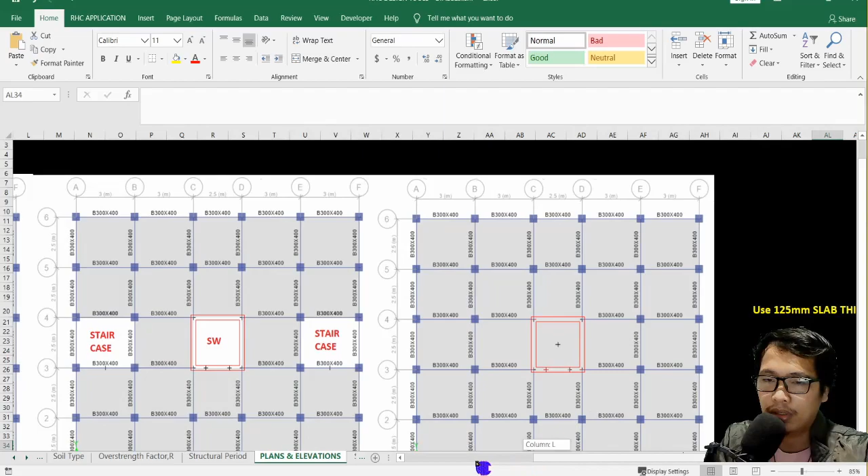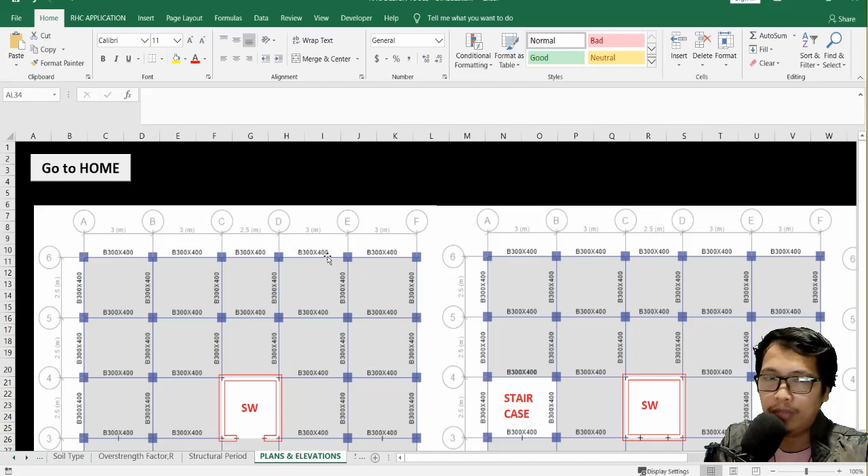As you can see in the NGL plan or the ground floor—by the way, the level of the NGL and ground floor is the same as per my design. So if you can see, this is 12 plus 2.5, that is 14.5 meters by 12.5, by 14.5, a 7-story residential apartment building.

Okay, then we have a shear wall in the middle. Then let's come now to the second floor up to the 7th floor, which is our typical floor.

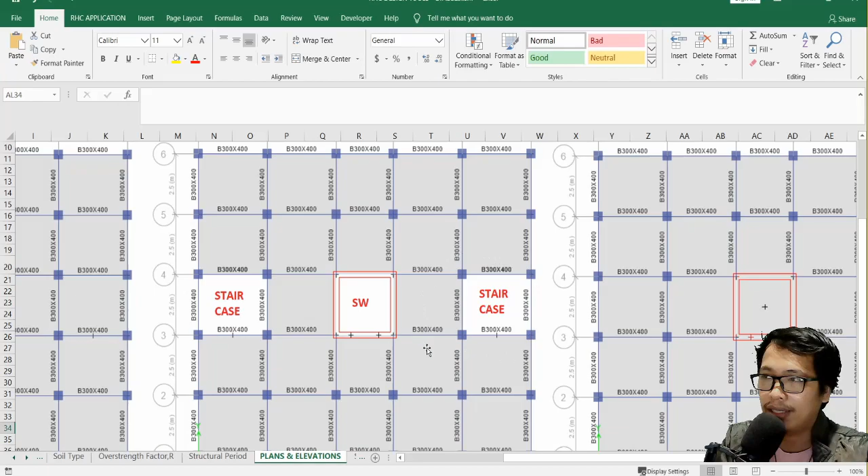So as you can see, we have two staircases, the left and right, which is along the grid line 3 to 4.

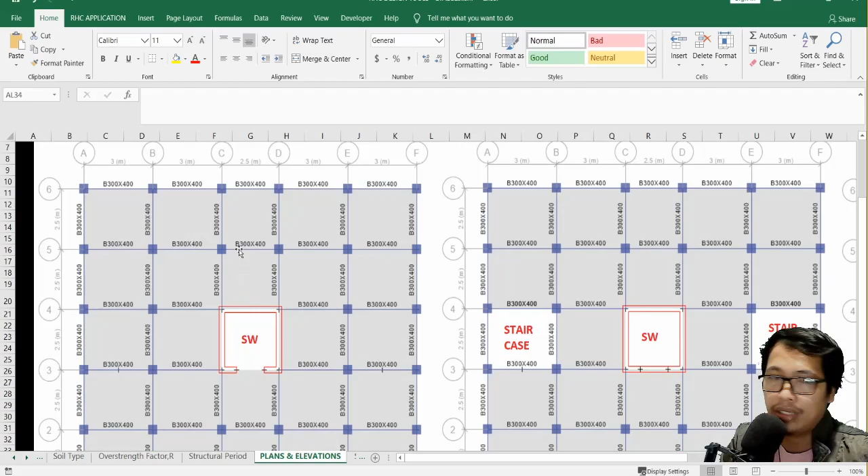...the elevations. Let's go back first to the dimensions. As you can see, the initial condition, the initial dimension of the beams, is 300 by 400, same with the upper floors, upper beams.

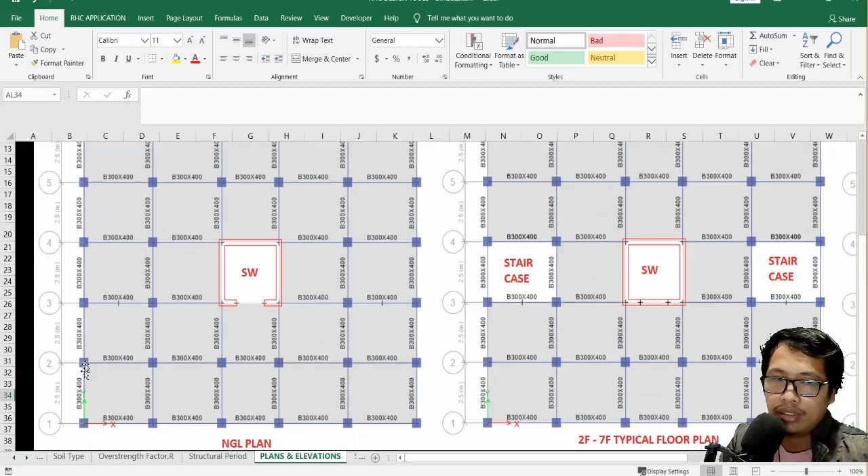Then in the elevations at grid line A, as you can see in the plan, this is grid line A. So if we look at it, these are the elevations. Then the initial assumption of the size of the column is equal to 400 by 400.

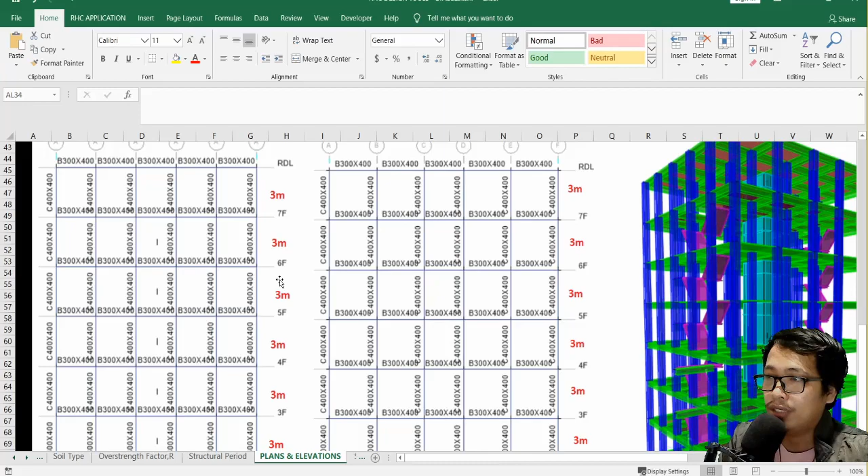Then our assumption from the foundation to the natural grade line is 2 meters. Then from the natural grade line up to roof deck level, the elevation is the same per story, which is equal to 3 meters. Okay, this is for grid line 1.

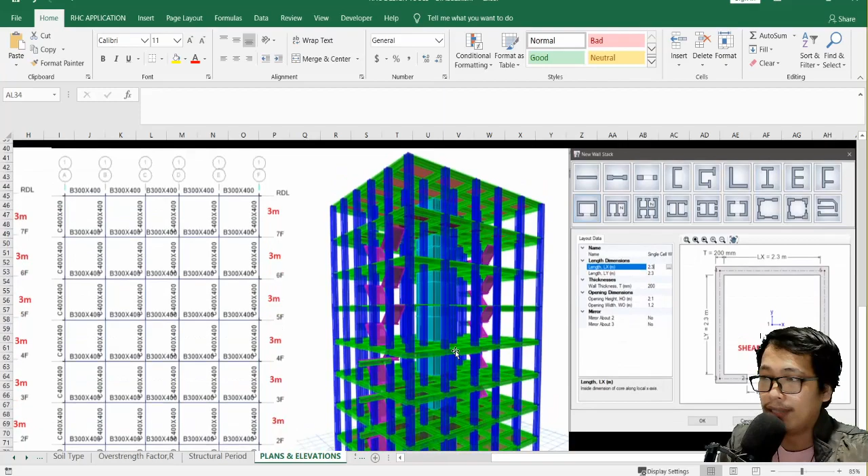As you can see in the 3D model, this is our structural 3D model, the perspective. Then we also have the detail of the shear wall, which is this.

From the face of this wall to the other end, it has 2.3 meters, same with the other axis. Then we have an assumption of 200 mm thickness for the shear wall. Then the opening for the elevator is 1.2 meters, with a height of 2.1.

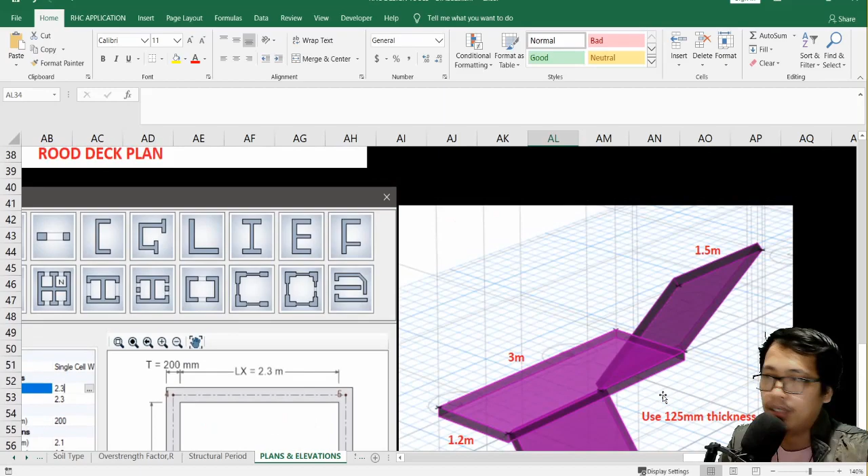Okay, then for the stair detail, I modeled it directly into the structure. So we have 1.5 meters as the width of the stair, same for the first and second flight. Then for the landing, we have 1.2 meters width, and a length of 3 meters, then 1.5 meters height at every flight.

So that's what I meant: the elevation or height is 1.5, then another 1.5 on top, so you'll notice that totals 3 meters. Then of course the assumption is to use 125 mm thickness for the stair slab.

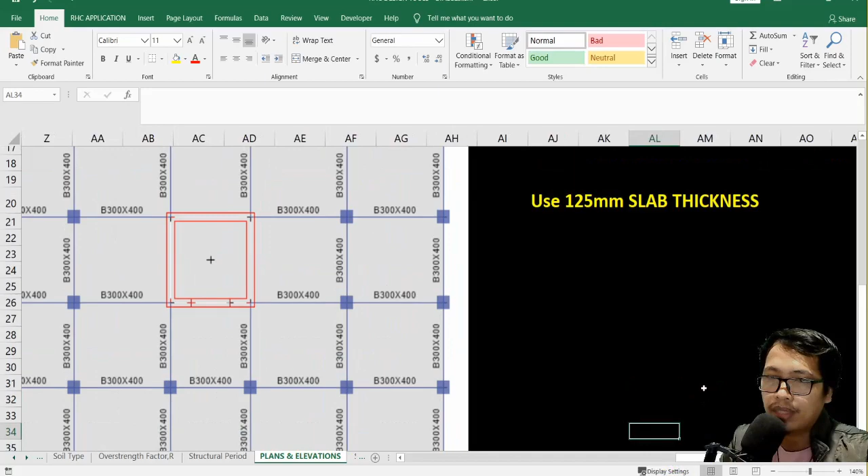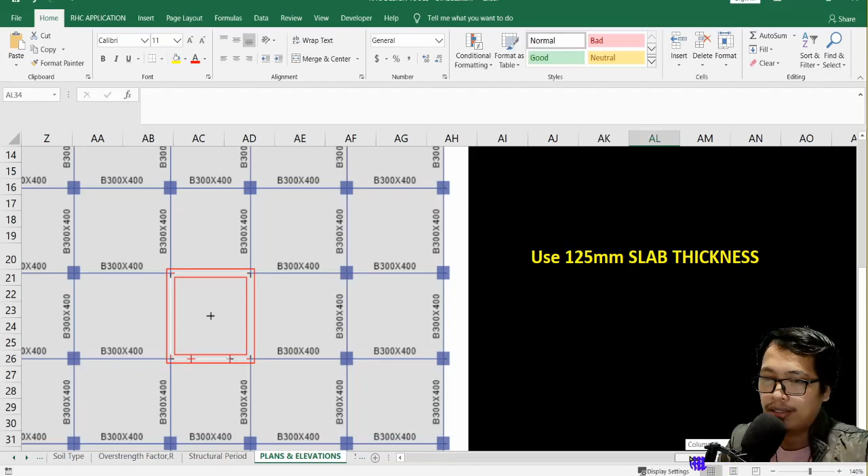Okay, so going back, for the assumption of the slabs, the floor thickness, we use a 125 mm slab thickness. Then let's go to home.

So the design specifications or references for this are the NSCP 2015, the ACI 318-14 for concrete, the UBC 1997 for earthquake, and ASCE 7-10 for wind.

Okay, for the materials, we use concrete and rebars. For the concrete, we use f'c or compressive strength of 20.7 megapascals or 3000 psi. While for the rebars, we have two classes: the main bars with fy equal to 415 megapascals or 60 ksi, then fyt for the stirrups and ties, which we can use at 275 megapascals or 40 ksi.

So our main bars are grade 60, then grade 40 for the stirrups and ties, as per ASTM 615. Okay.

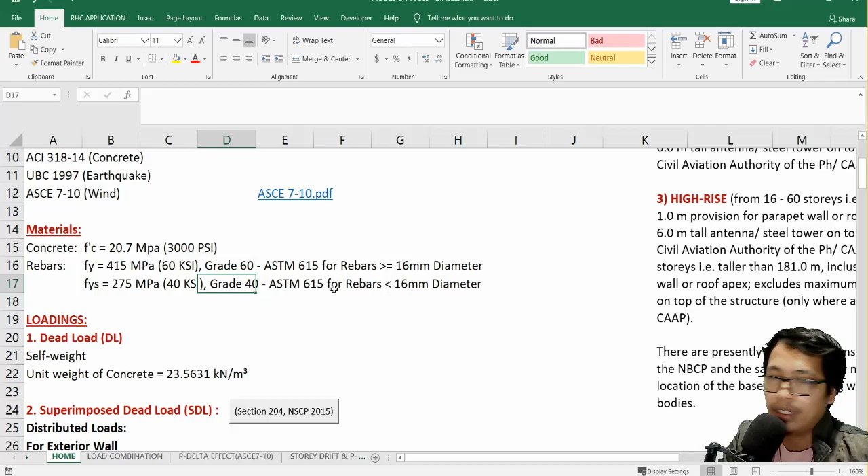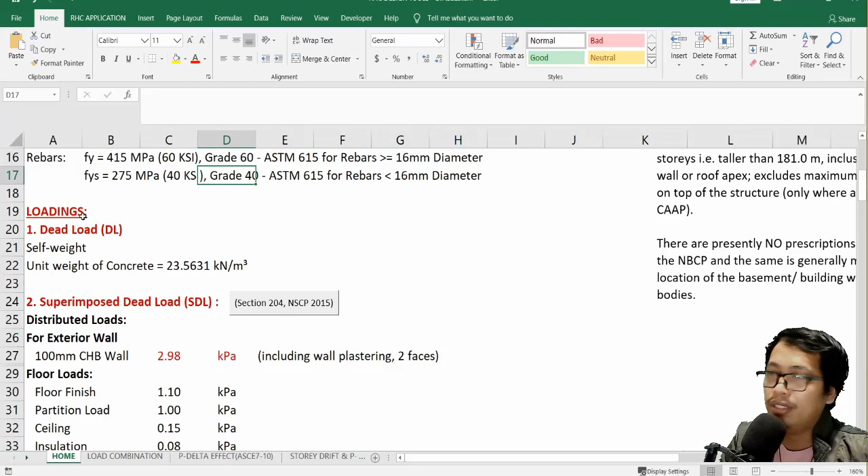Sige, discuss muna natin yung loadings. Okay, for the loadings, so may dead load tayo. Then under sa dead load, may self weight tayo, which is the weight of the structural members.

Then yung unit weight natin ng concrete na gagamitin natin is 23.5631 kilonewton per cubic meter.

Then may superimposed dead load tayo, or the SDL, as per section 204 NSCP 2015. Bali gagamitin nating exterior walls dito is the 100 mm CHB wall. So may 2.98 kPa tayo, which is including yung dalawang face ng plastering, as you can see in section 204 para sa 100 mm.

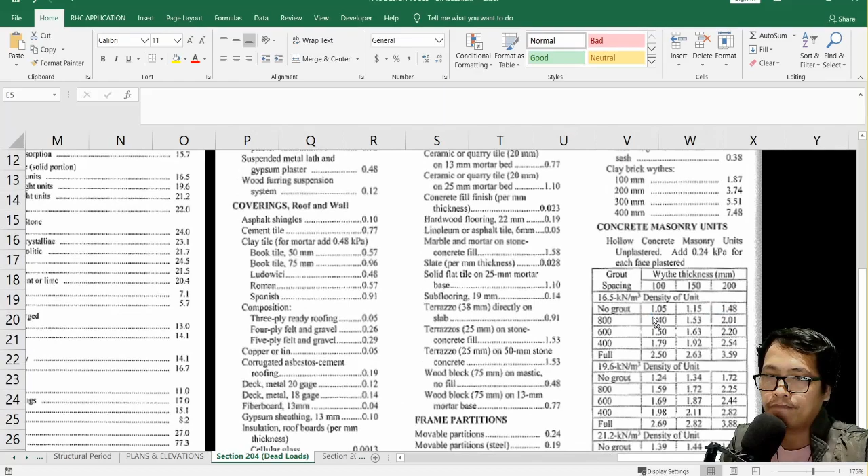Yung assumption natin rito is the full grout na wall para sa weight natin. Yung para sa 100 mm, bali yung weight natin or the load is 2.5 kPa.

So mayroong dalawa pa tayong 0.24 kPa para sa dalawang faces, kaya aabot yan sa 2.98 kPa. Balik tayo, check natin nun. Ito, as you can see in the formula, that is 2.5 plus 0.24 times 2, so 2.98 kPa.

Yung exterior walls natin, i-apply natin yan mamaya.

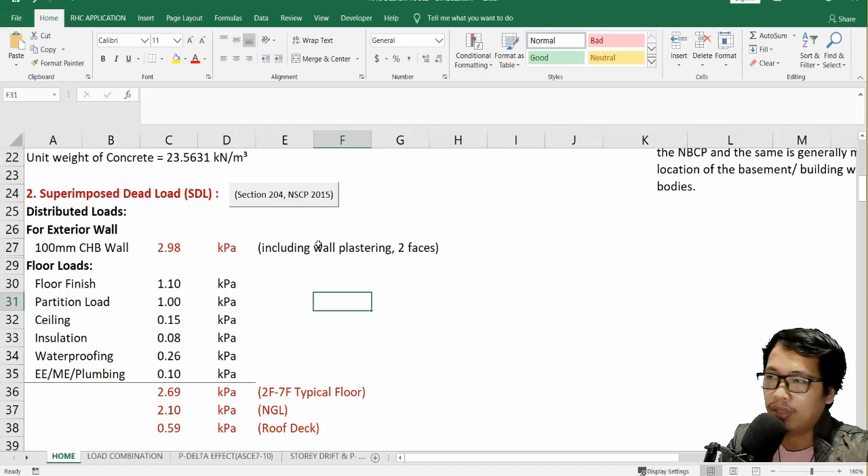Okay, for the floor loads naman, for the upper floor natin, may floor finish tayo, partition load, ceiling, insulations, which include yung mga sa mechanical natin insulation, waterproofing, then EE/ME plumbing. As you can see in the NSCP, o kapag wala sa NSCP, you can use the internet or the search bar sa Google para makuha ninyo yung specific na materials.

Ang kailangan natin yung unit weight ng per materials. Bali yung sinearch ko dun sa Google, ito yung waterproofing kasi wala dun yung waterproofing. Pag i-plus natin yan, naabot yan ng 2.69 kPa for the typical floors.

So second floor up to the 7th floors, okay na yan, 7 floors wala kay. Then while in the NGL is 2.1. Bakit 2.1 kPa lang? As you can see in the formula, ito lang yung floor finish plus the partition load. Kasi wala nang ceiling, walang insulation, walang waterproofing, then walang plumbing, yun yung assumption ko rito.

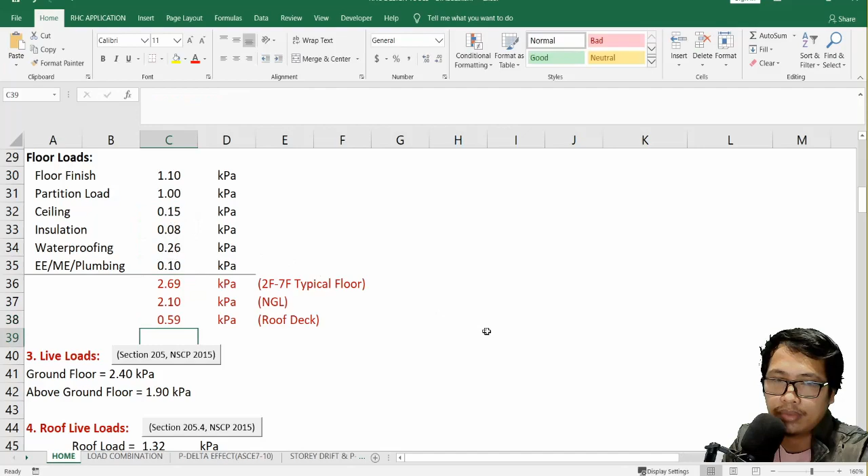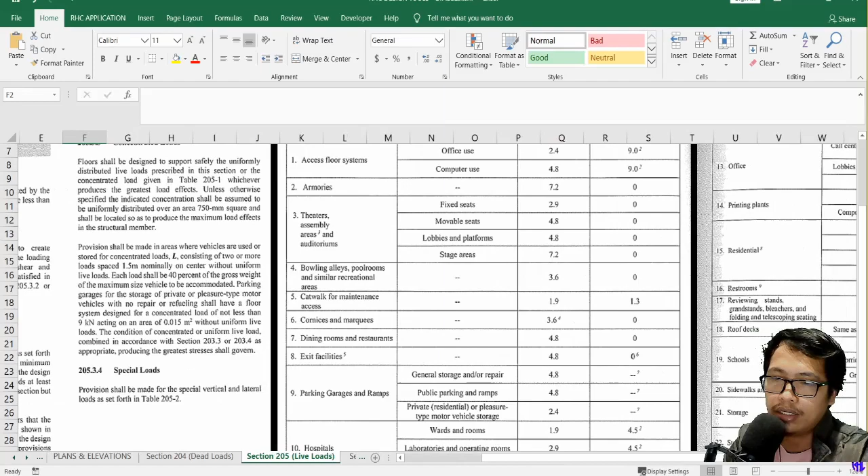Let's continue. Let's come now sa live loads. For the ground floor, assume ko is 2.4 kPa as per section 205 NSCP 2015. Then the above ground floor is 1.9 kPa. Kapag residential, as per the NSCP, kasi residential naman yung i-design natin, so yung basic floor load is 1.9 kPa.

Let's continue. Para sa roof live loads naman, pupunta tayo sa section 205.4 ng NSCP 2015. Yung roof load natin, yung assumption case, papasok tayo sa 1.32 kPa.

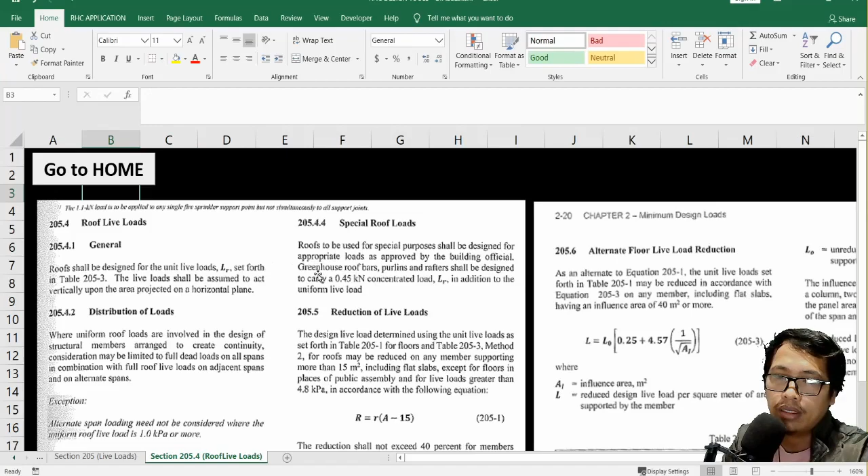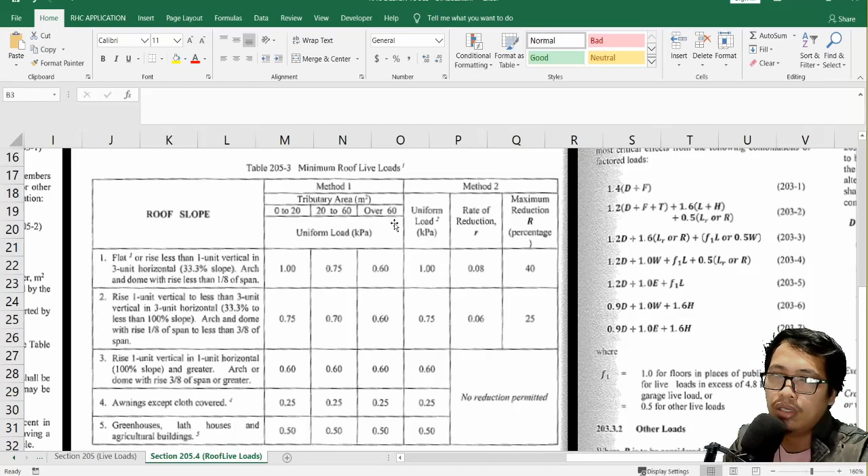Bakit again 1.32 kPa? That is 0.6 plus 1.2 times 0.6. Kasi yung 0.6 natin, as you can see, that is ang load ng flat roof. Ito yon, yung 0.6 natin. So over 60 yung tributary area kasi malaki yan, so 0.6.

Tapos kung mapapansin niyo, may 3 na designation yan, so babasahin natin yung 3. A flat roof is any roof with a slope less than 1 unit vertical in 48 unit horizontal, or 2% slope. The live load for flat roofs is in addition to the ponding load required by section 206.7.

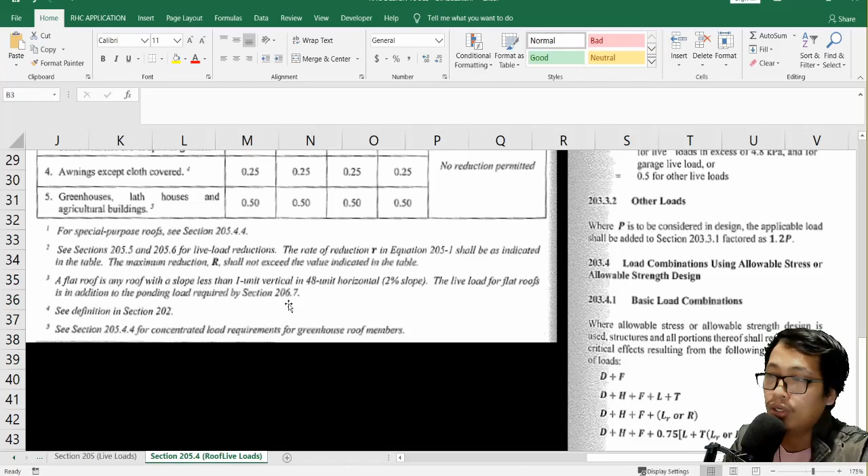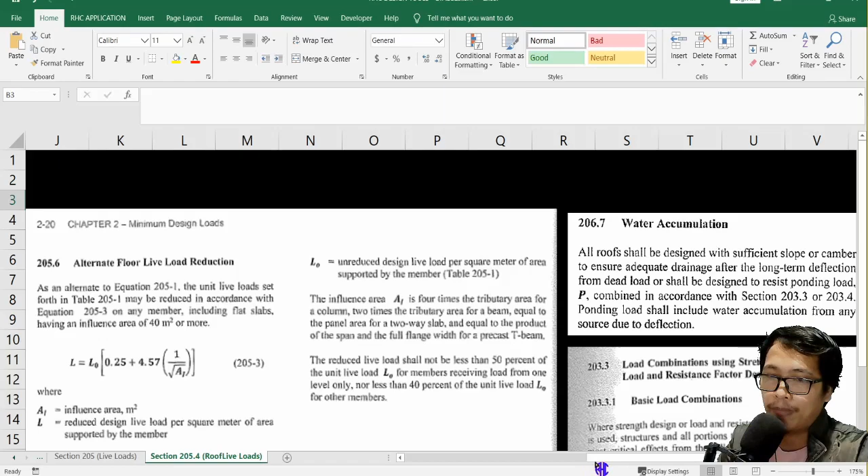Bali, additional ponding pa tayo doon. Section 206.7, kapag balikan natin, that is the water accumulation. Sabi naman doon, all roofs shall be designed with sufficient slope or camber to ensure adequate drainage after the long-term deflection from the dead load, or shall be designed to resist ponding load combined in accordance with section 203.3 or 203.4.

Ponding load shall include water accumulation from any source due to deflection. So, yung section na to, this is the load combination. Kapag i-check natin yung other loads rito, sabi rito, where P is to be considered in design, the applicable load shall be added to section 203.3.1, factored as 1.2P. Kaya, yung load ko para sa ponding o para sa roof live load is 1.2 times P.

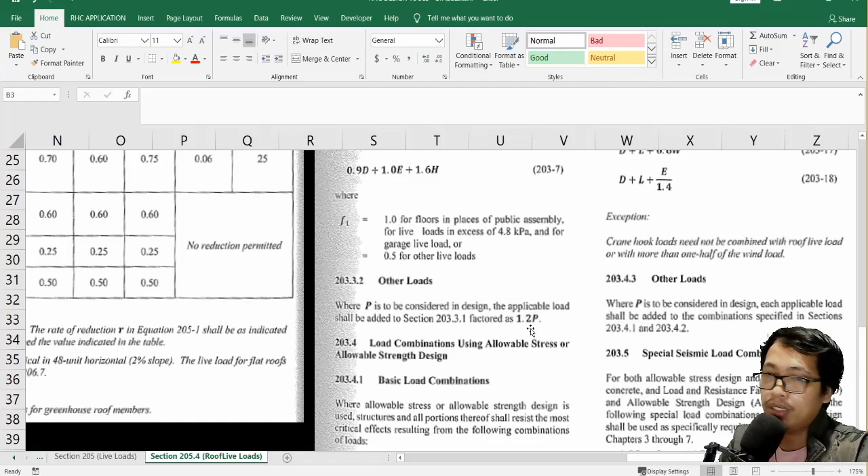May additional siya na 1.2 para sa ponding. Balik tayo. Kung mapapansin niyo, yung roof load natin na 0.6 plus the ponding, the 120% of the roof load. Okay, let's continue.

So for the seismic load naman, as per NSCP o by the UBC 1997, we can use the X and Y direction. Then we can consider this positive and negative eccentricity. Then we can use the eccentricity ratio of 5% or the 0.05 decimal.

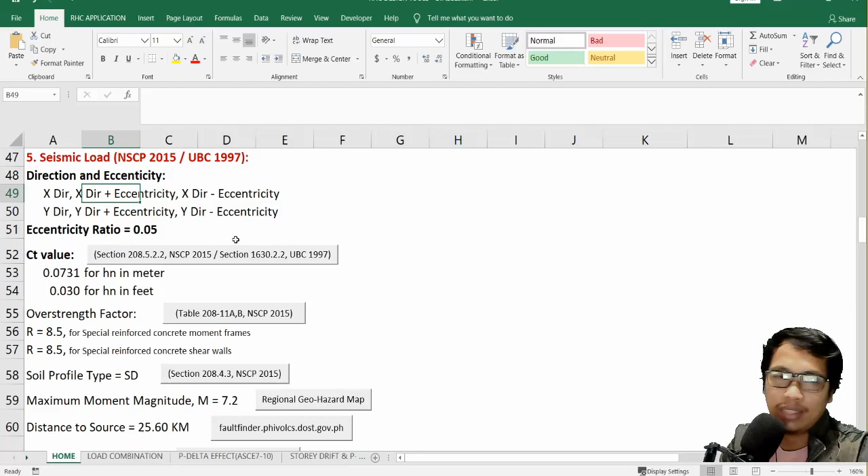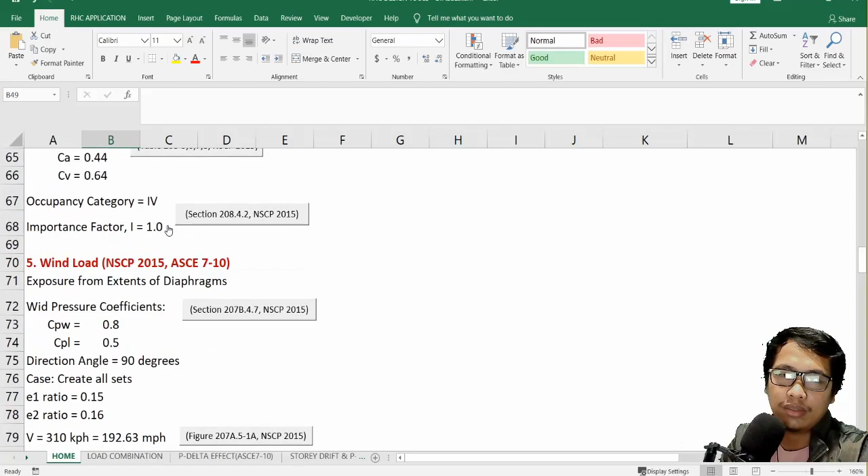Okay, so discuss muna natin to. Okay, so seismic, ito yun. Balikan natin mamaya after we model the structure. Then number 5, may wind load tayo as per NSCP 2015 o the ASCE 7-10. Then may mga coefficient tayo.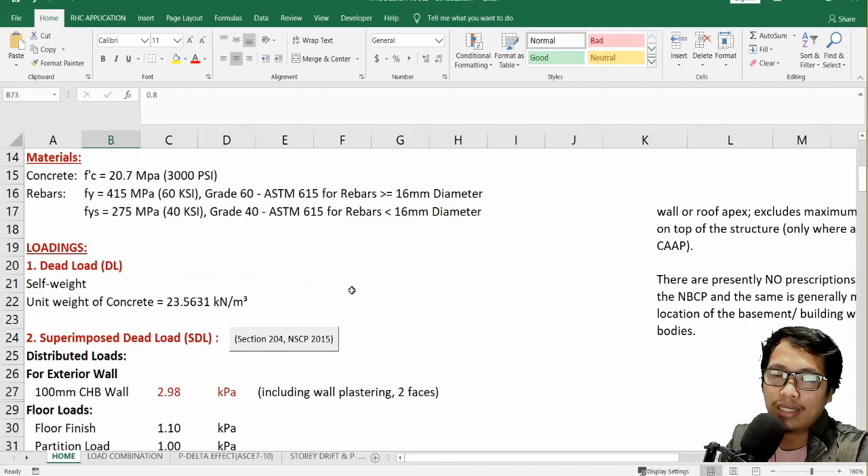Okay, balik muna tayo dun sa model. Balik na tayo dun, mag-model tayo na sa structure natin. Okay, so first mag-new model. Then use built-in settings, dapat naka-metric tayo. Okay na din.

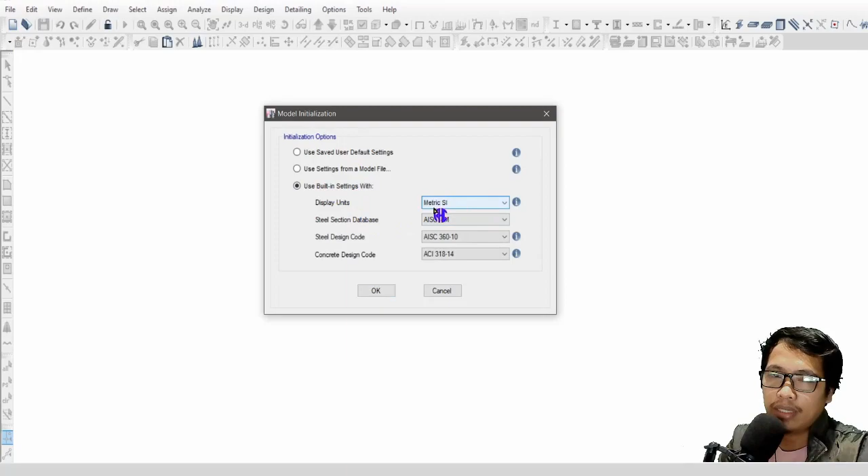Okay, gagawin ko muna to, mamaya ko na i-edit yung parameters natin. Hintayin natin yan. Close ko lang to, gusto ko yung isa lang interface. Dito ko na i-edit yung parameters natin.

Grid lines, modify, show grid lines. Then display grid data spacing. Yung bubbles natin i-reduce ko na lang ng mga 700. Okay, as spacing. Okay, so as per sa

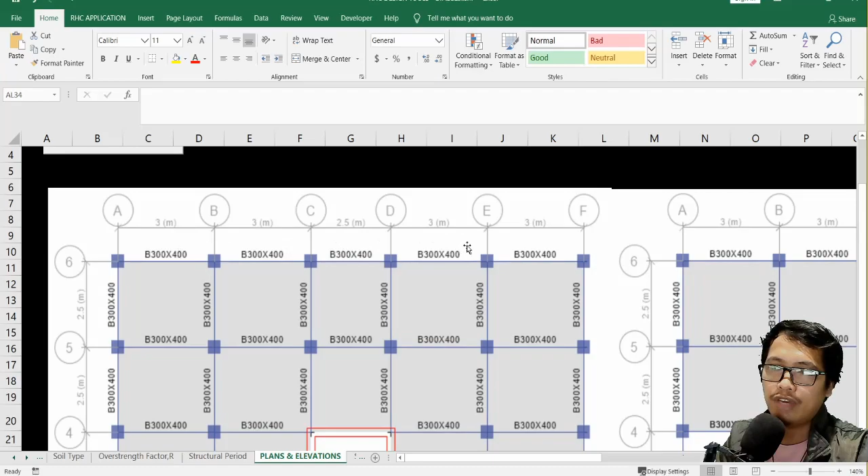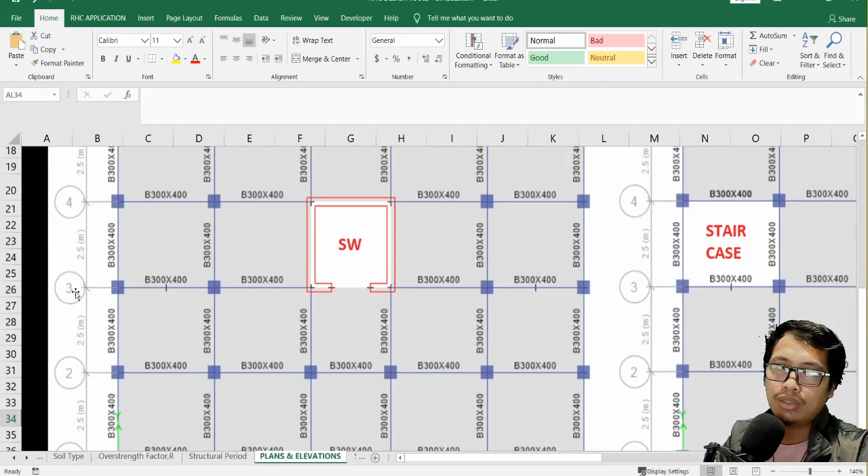parameters natin sa plans, yung along X direction natin, that's 3, 3, 2.5, 3, 3. Then A, B, C, D, E, F yung grid line natin. While in the Y direction, that is 1 to 6, tapos lahat siya 2.5 meters. Okay, so that is up to F, so mag-add ako dito ng up to F. Then change ko to ng 3 meters, 3 meters, then 2.5, 3 meters, and 3 meters.

So kapag spacing, yung gagamitin niyo dapat naka-0 yung huli palagi. Then para sa Y direction naman, okay, so that is up to 6 grid line. So kailangan ko magdagdag ng dalawa. Spacing natin is lahat 2.5.

Okay, then as you can see, nagano siya, makikita natin yung update ng grid lines. Then kung okay na yan, so just click OK.

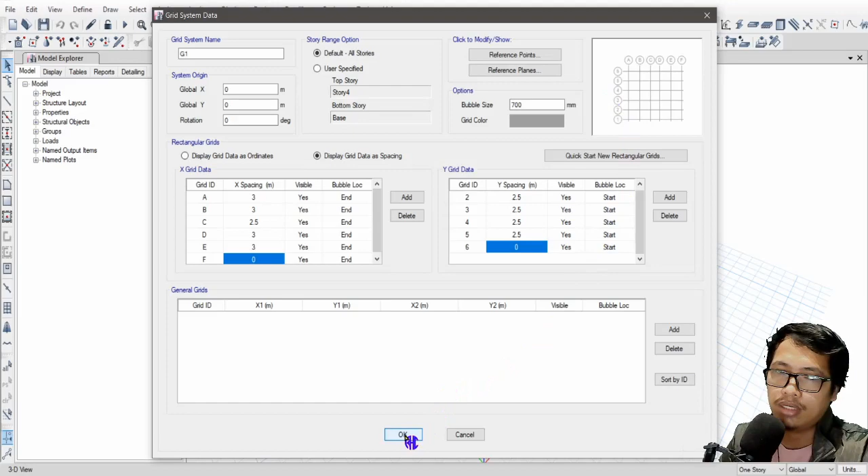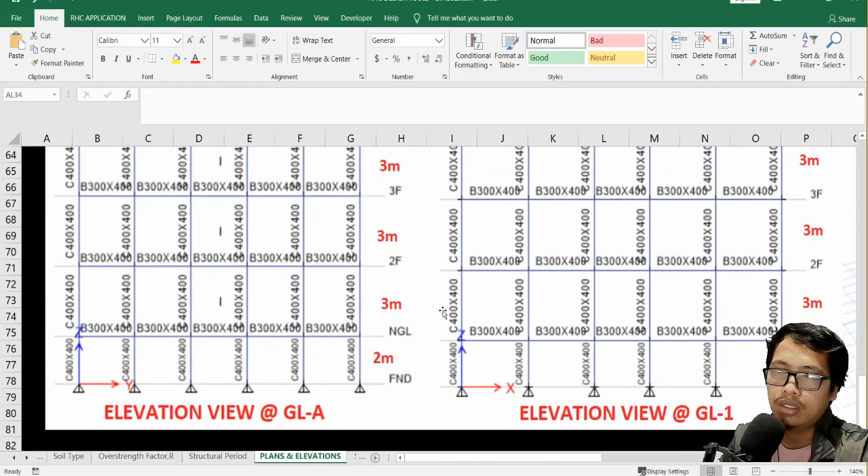Then punta na tayo doon sa elevation, the story data. So story data natin, as you can see in the elevation, okay, so bali may 2 meters tayo from foundation to NGL. Tapos NGL to second floor 3 meters. Tapos yung typical natin up to 7 floors or the roof deck, so 3 meters na yung height natin.

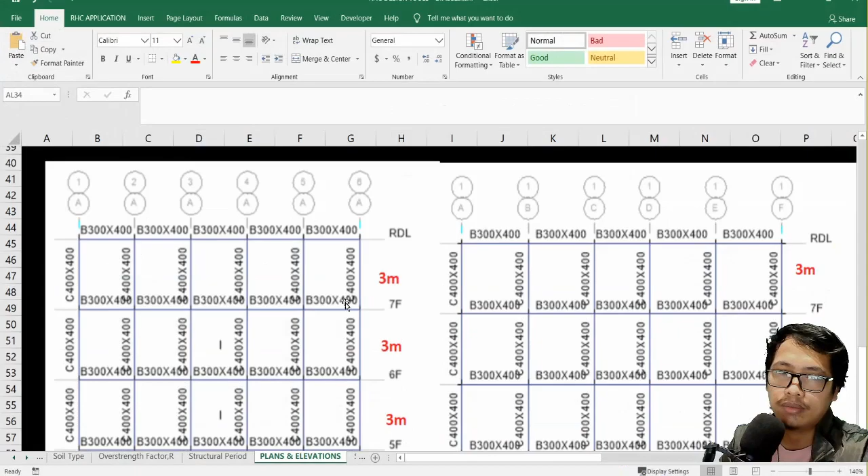Okay, so bali 1, 2, 3, 4. Ilan yung kulang natin doon? Okay, so bali balik tayo. So this is 1, 2, 3, 4, 5, 6, 7, 8, 9. 9 yung level na gagawin natin. This is 1, 2, 3, 4, 5. So kulang pa tayo ng 4.

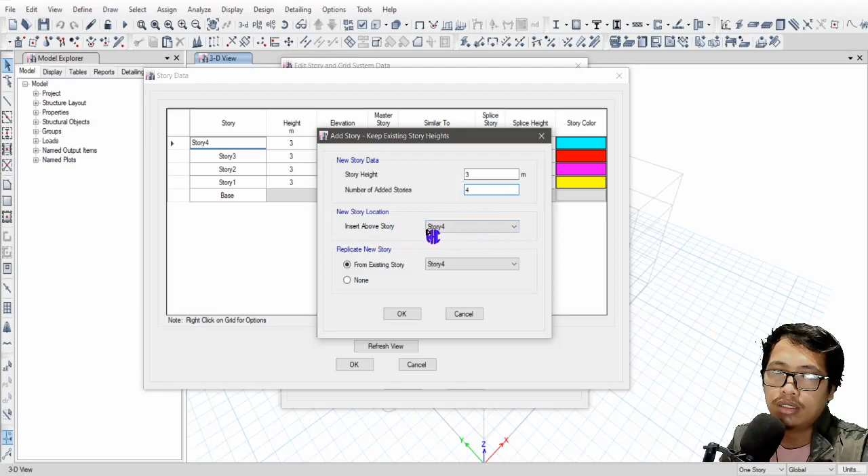So click lang dito, right click, add story, keep existing story height. Then 4 yung kulang natin, 3 meters. Then number of added stories 4. Insert above story 4. Okay, then i-on lang yung replicate new story.

Okay, so this is foundation. So yung designation natin, foundation. This is the NGL, 2F, 3F, 4F, 5F, 6F, 7F, and this is the RDL.

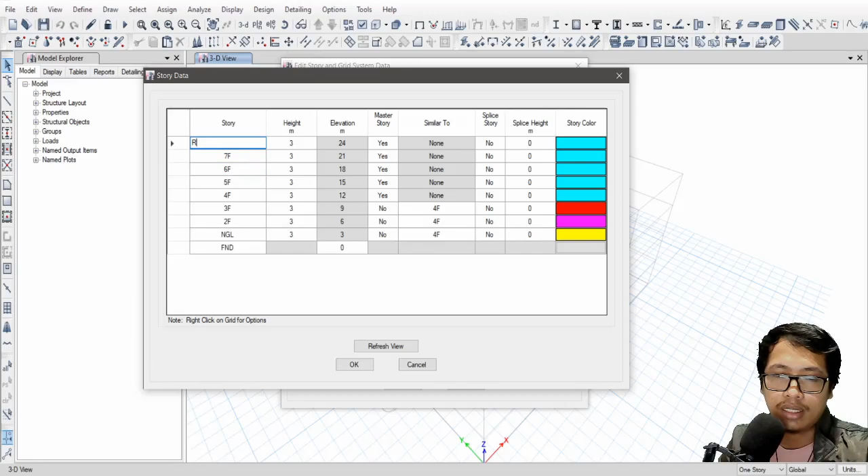Okay. Wait lang, hindi natin na-edit yung elevation, yung story height. So this is 2 meters, then the rest is 3 meters. Okay na yan, so as you can see, yung elevation total distance natin, total elevation, that is 23 meters.

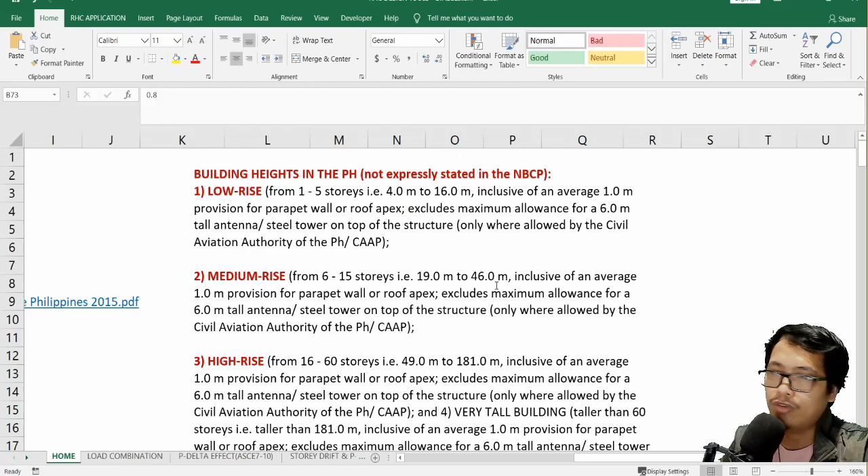Yung kapag i-compare natin dun sa qualification ng medium rise building as per National Building Code, so papasok tayo, kasi that is between 19 meters to 46 meters. Okay.

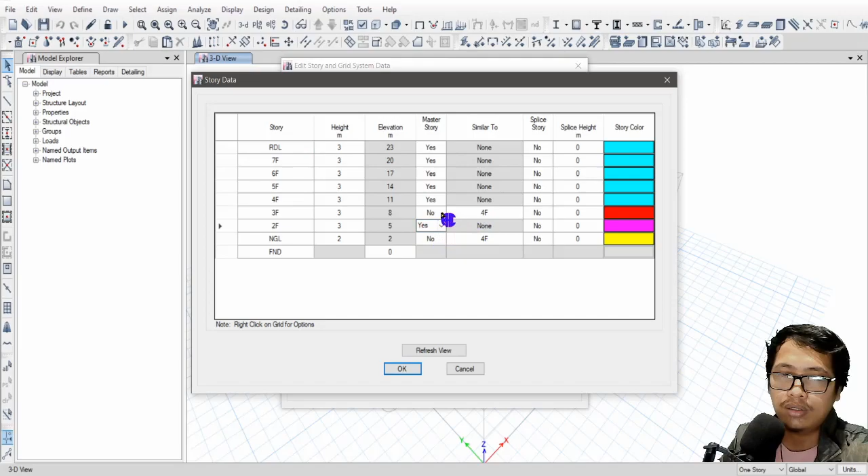Then mag-set tayo ng master story. Yung master story, para once na every time mag-change tayo doon, yung kaparehas na story is automatically mag-change yung mga changes. Then yes natin to, then the rest no. Bali yung master story natin is yung second floor.

Tapos yung typical floor natin ito, copy paste na lang natin to up to the 7th floor. Yan, then okay. So ito na yung structure natin.

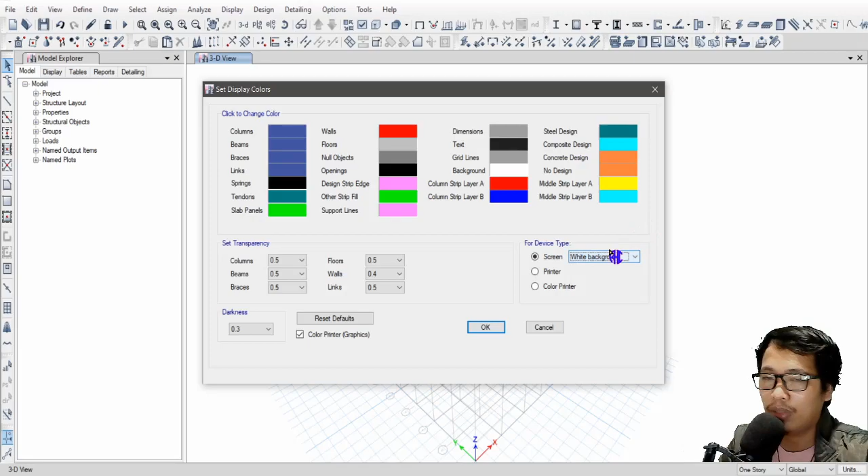So sa option, pwede natin yan i-change yung kulay, dito lang yan sa option. Graphics, color display, tapos yung for device type, yung white, tapos ito yung black. Pero for this presentation, I will use the white background.

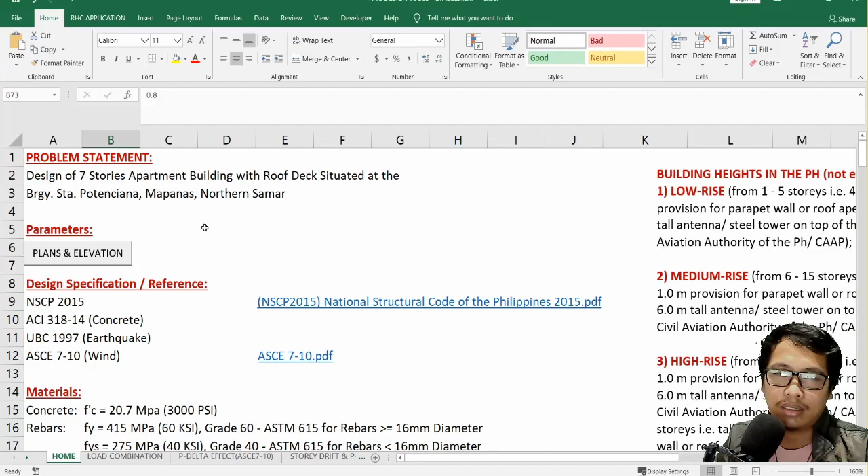Okay, so yung assumption natin ng size ng structural frames, that is for the beams 300 by 400. Then para sa column, that is 400 by 400. So designation pala natin para mas madali as per survey, so dapat ganito yung pag-designate natin para mas madaling maintindihan.

For example, sa 300 by 400 na beam, RB 300 by 400, that means the reinforced beam 300 by 400, which is the dimension. Then next is the FC, which is the compressive strength of the concrete, FC3, which is 3 KSI. Then the FY 60, then FYS 40, so that is the strength of the rebar.

Then same with the column, so i-change lang natin yung RC. Then sa slab naman, RS for represent the reinforced slab. Okay, so balik tayo.

So by the way, aside from assigning by assuming a dimension of the structures, we can use the auto-select analysis of this software by using ETABS. Pero as per the initial condition natin, mag-assume tayo ng initial sizes.

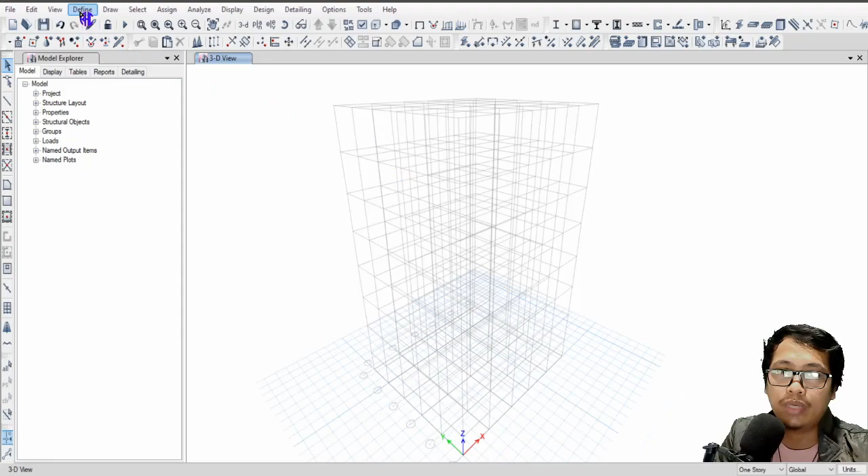Okay, so first, we can define the material properties. Then add new materials, United States, then of course the concrete.

Customary in Northern Samar, the available concrete strength is only 3,000 PSI. Although some projects can provide higher strength, I'm not sure if it's available here for the concrete plant. It's hard to produce high strength by manual mixing.

So that's why 3,000 PSI is the available strength for Northern Samar. Then the properties will pop up, which is 23.5631 for the unit weight per volume. This is our requirement. The modulus of elasticity is automatically computed based on our F'C.

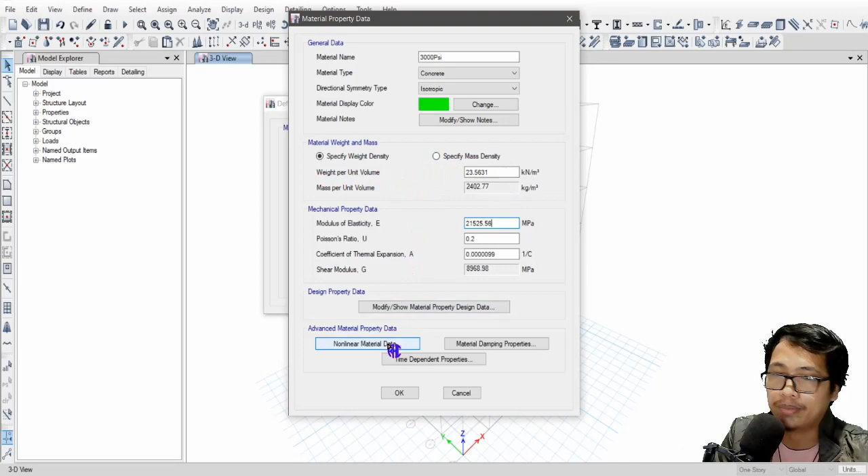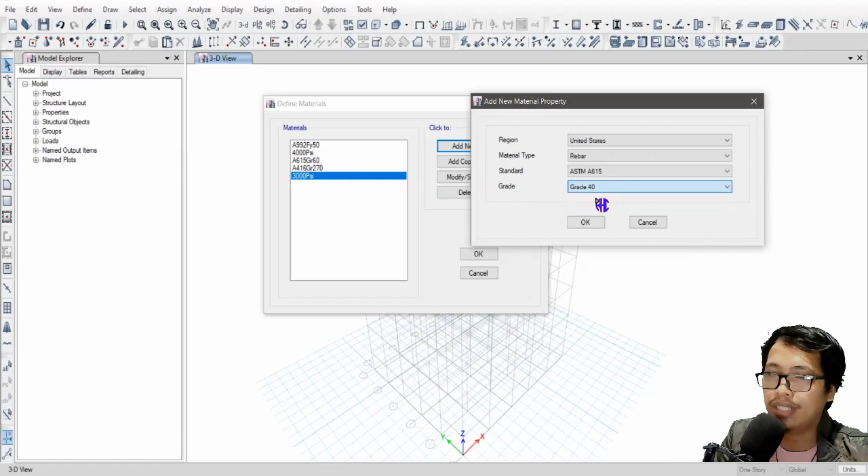Then we add new materials again. Instead of concrete, we select rebar. Then of course, standard ASTM A615, grade 60. As you can see on the left side, we already have A615 grade 60, so grade 40 is the one I'll select. Then this is our unit weight per volume.

That's okay now, so we already have materials. These three are the ones we need. Then after that, we can now define a section. So define section properties, then frame section.

As you can see, we have default sections already. So when I'm designing, I delete those first. First, delete multiple properties, then drag all, then delete, then also delete the other section.

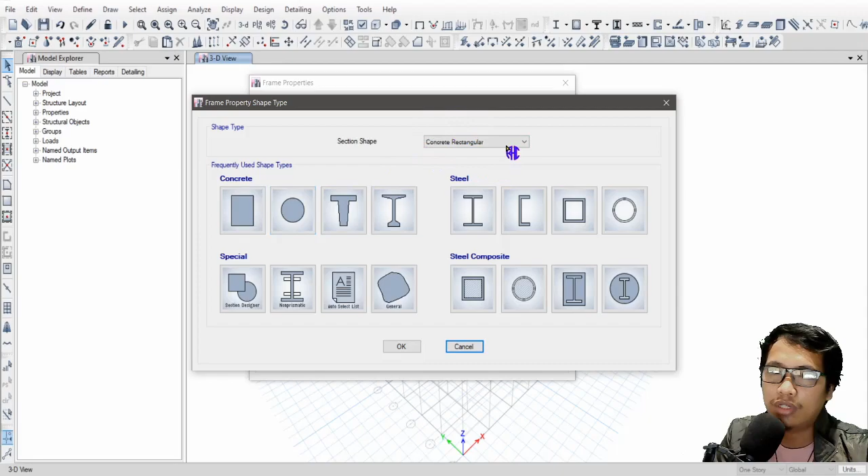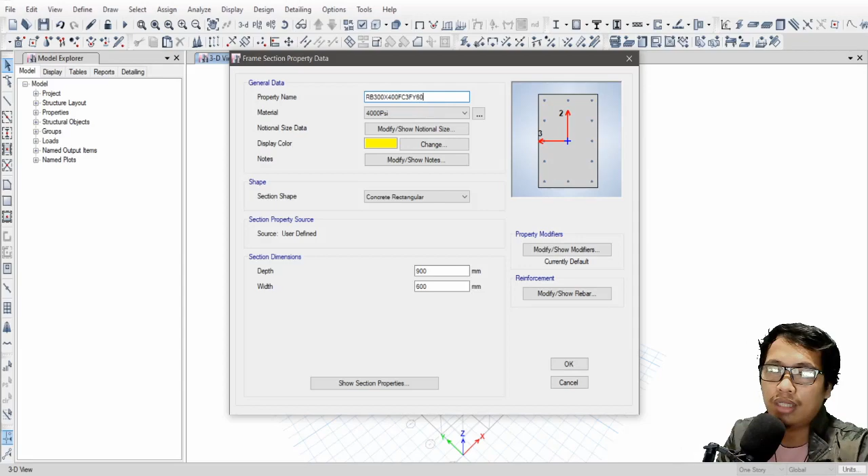Wait for the frame section property data to pop up. For our beam, that is RB 300 by 400. Then the FC, which is 3 KSI, the FY is 60 KSI, 60 PSI.

For our rebars, that is 60 KSI. Okay, 60 KSI. And for the FYS, for the ties, for the stirrups, it's 40 KSI. Then of course, our material for concrete is 3,000 PSI.

Then I can change the color of this beam, or we can set that as a default color, yellow, so it won't change anymore. Then our size is 300 by 400. Our depth is 400, while the width is 300mm. As you can see, this section is for the column, so we need to change that.

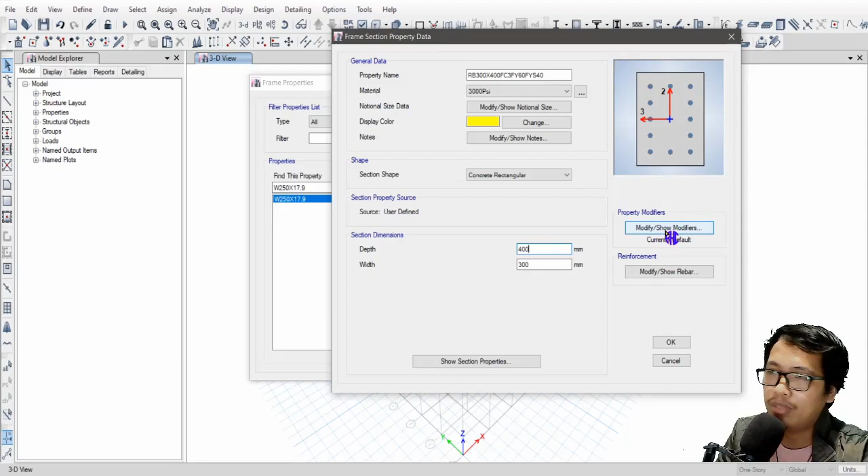So let's go to the property modifier now. Just click. Okay, as per NSCP, the table for 406.6.3.1.1a, our column is 0.7, the gross moment of inertia.

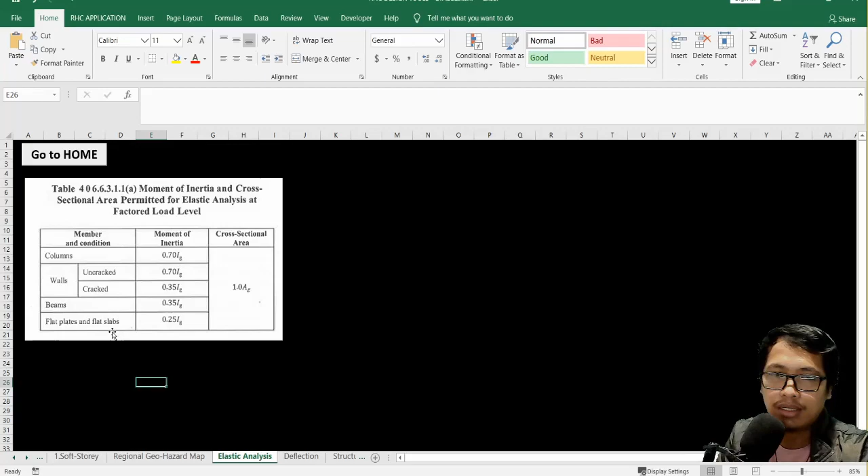Then for the slab, for the beams it's 0.35 times IG. Then the flat slab is 0.25 IG. As you can see, this is the table in the NSCP. So columns 0.7, beams 0.35, then the flat plates and flat slabs is 0.25.

So that's why for the beams, we need to reduce the moment of inertia by 0.35. Just click OK. Then click on the reinforcement properties. As you can see, it shows column section because that's the default, so we need to click on it for beam design.

Then longitudinal grade 60, confinement bars, of course grade 40 is what we'll use. For the cover to longitudinal rebar group centroid, what this means is this is not the concrete covering. This is the assumption of the distance from the face of the beam to the centroid of the main rebar.

So 60 is okay. Why? From the face of the beam, our concrete cover is 40, plus our assumption of 10mm for stirrups. So 40 plus 10 is 50, plus half of the longitudinal bar or main bars. Our assumption is 16mm, so that's 8mm. So 50 plus 8, that's 58mm, approximately 60. So that's okay.

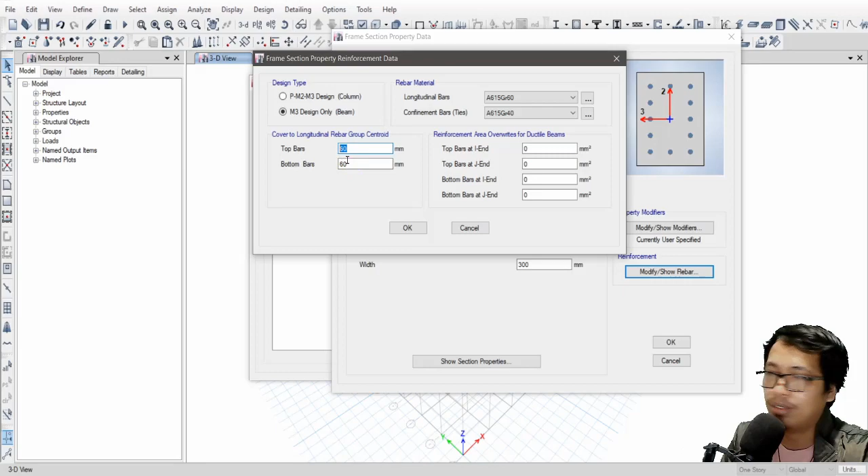Then that's fine. Click OK, then click OK. So we've defined the beam. Now I'll delete this property. Just delete this property. For the column, I'll just copy this designation. Copy, then we can click add copy property to make it easier.

Then I'll paste that, then change it. This is RC 400 by 400. Same properties, 3,000. Then this, of course, should be 4,000. Then the modifier, when do we change that? Because this is a column, that is 0.7 as per the code.

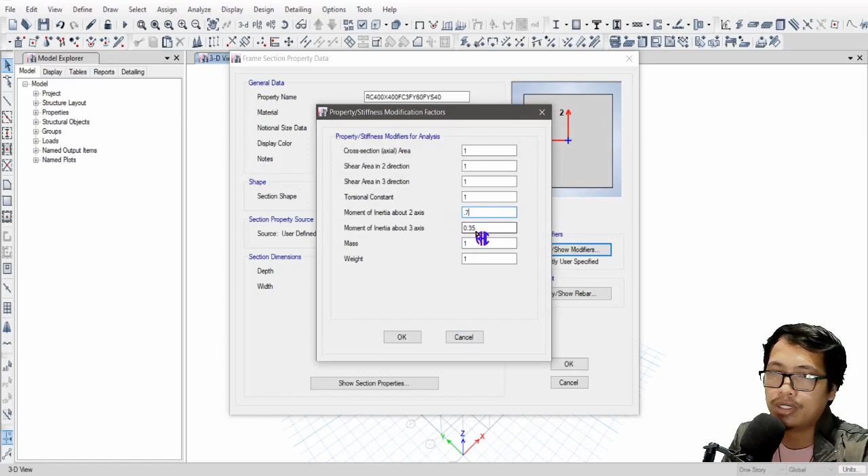In reinforcement property, instead of beam, we select the column design type. Rectangular, then ties, then reinforcement to be designed. Since it's 400, we can use 4x4 bars, 20mm for the main bars.

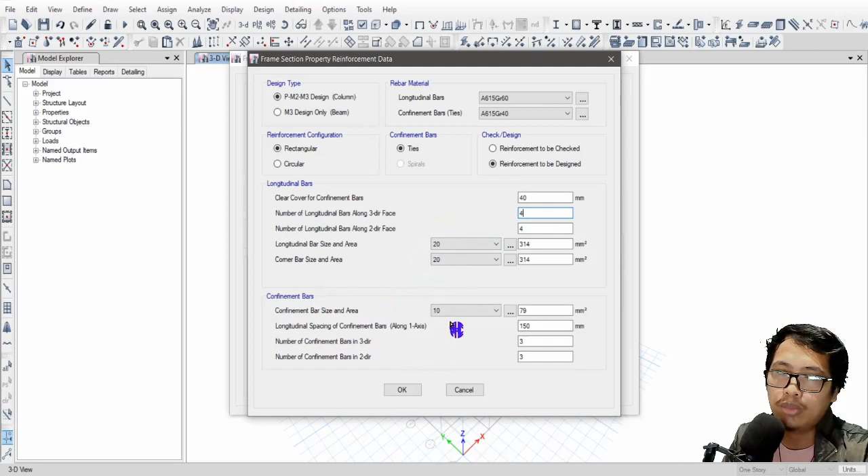The confinement bars are 10mm. As you can see, these are the bars. You can reduce the number of bars as per the data. Click OK. So now we have two properties defined.

What we still need to define is the slab. So go to define, section properties, but instead of frame section, slab section. Click slab section. There are two default properties which you can delete, then modify.

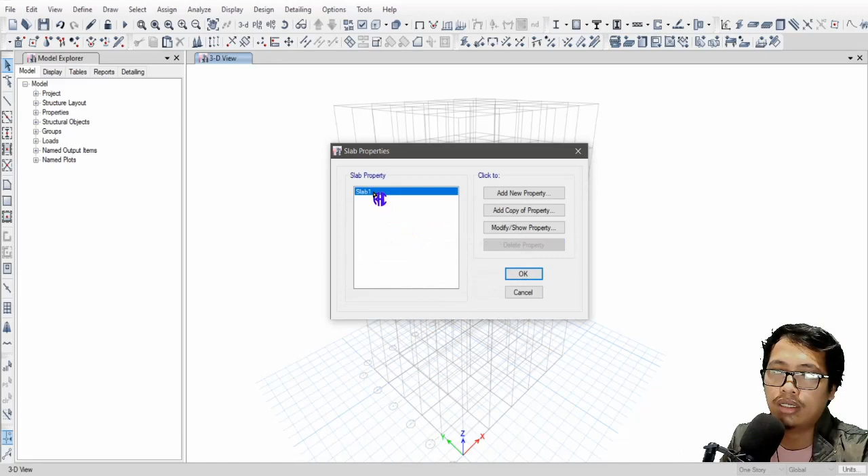This is RS125. The FC is 3,000 psi or 3 KSI. We don't have FY anymore, instead it's FYS which is 40. The slab property material is 3,000.

For the modeling type, we can use shell since we treat it as part of the structural members of the structure. If you use membrane instead, this signifies that the slab is only considered as a carrier of the load, so it doesn't become part of the structural members. For this presentation, I'll use the shell modeling type.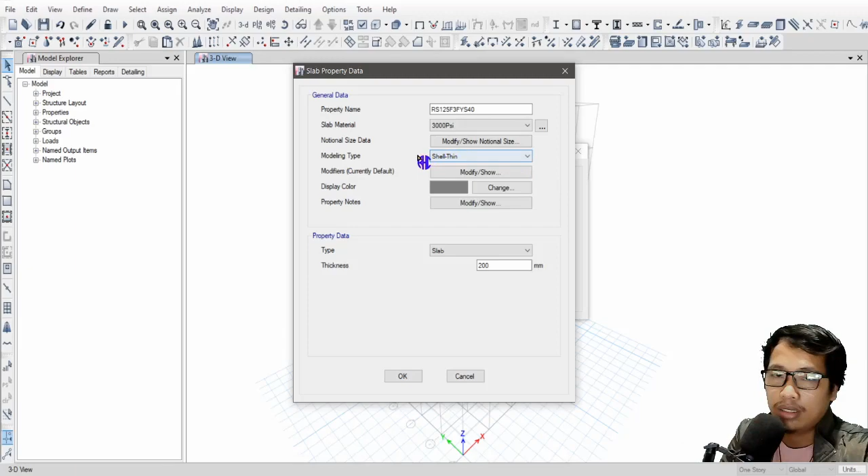The type, of course, is slab. The thickness, which is our assumption, is 125. This passes our minimum thickness requirement for the slab. Of course we also check deflection, but we'll still verify the deflection later.

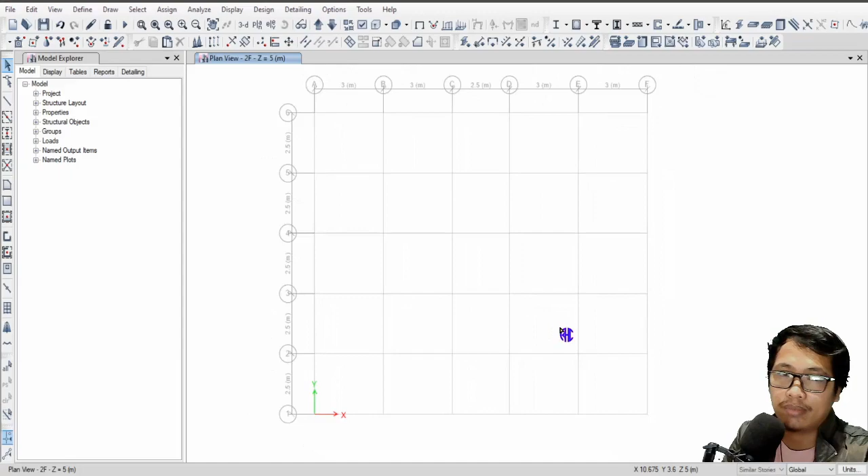Then click draw beams. As you can see in the properties, we automatically have the correct property already selected, which is RB for beams. But if it's a column, this is what we'd use instead.

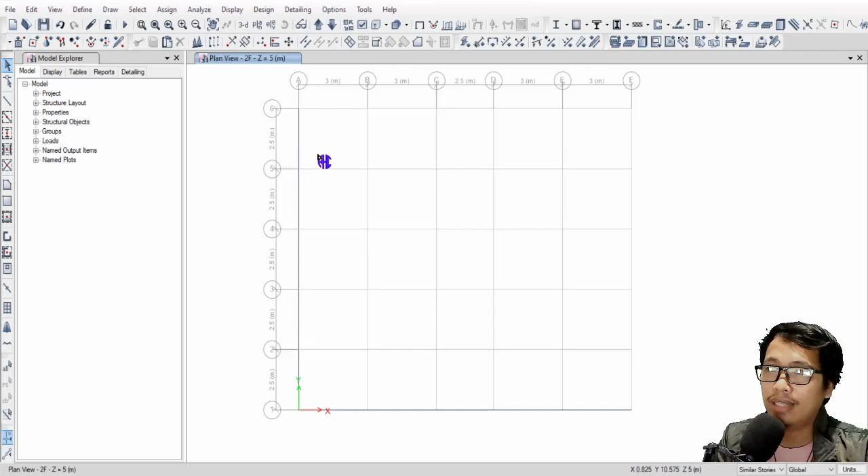This is 3 meters, 3 meters. Let me highlight this, then Control+R to replicate along the x-axis. So it's 3 meters each, but only two times.

Then apply. Highlight this one, instead of 3 meters, make it 2.5, just one time. Then replicate this again by 3 meters, twice.

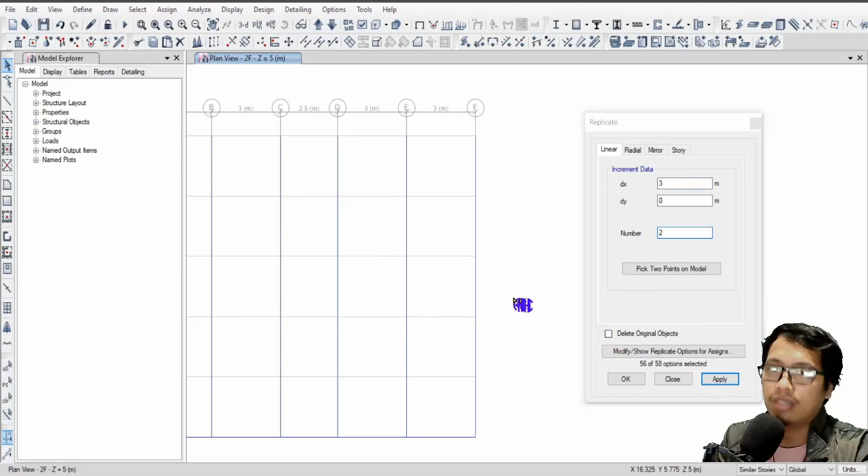So you can see this better, we can use extrude. Just click this icon, and this is our beam. Now let me replicate this, highlight, along the positive y-axis.

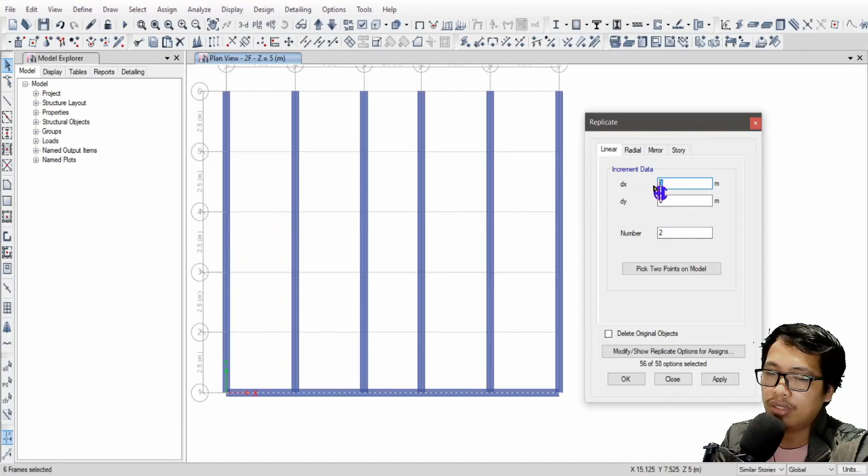This one is 0, and this one is 2.5. How many pieces? 1, 2, 3, 4, 5 - that's 5 pieces. As you can see, we've now modeled the beams.

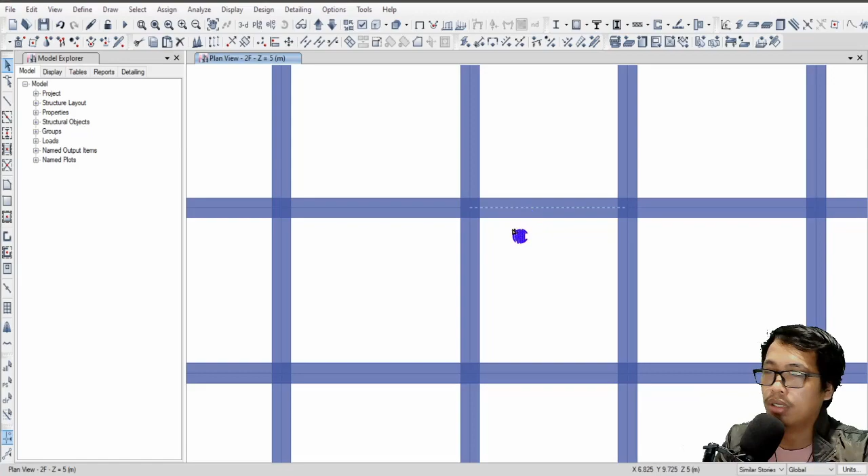Let me reset this first, show undeformed shape, click that. By the way, before anything else, we need to save this first.

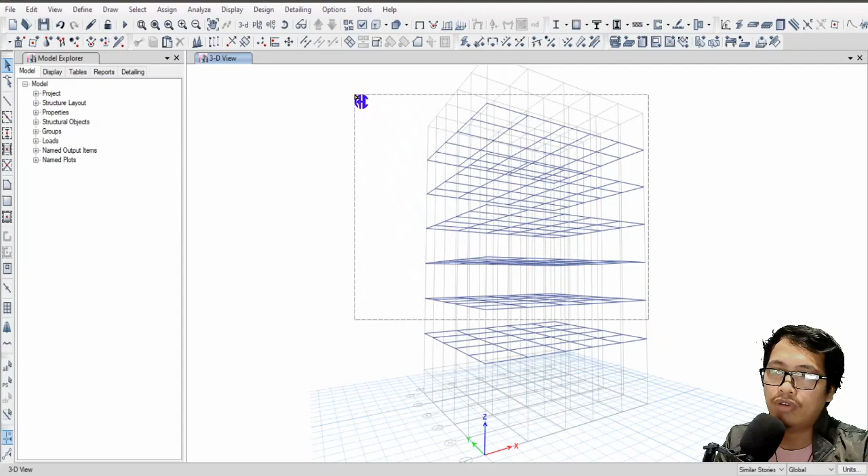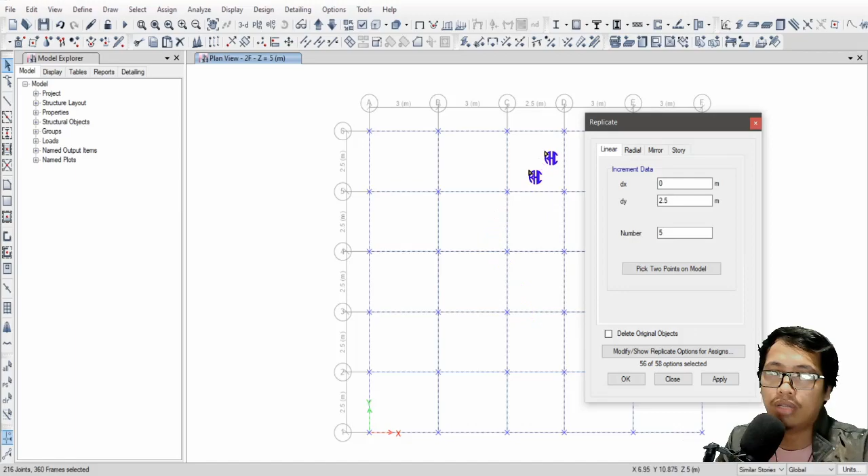So this time, let's go back to the second floor, highlight this, or we can just model first and apply the load later. So highlight, Control+R or replicate, then story - I'll replicate this to the ground floor. The arrow points to NGL, then apply, and you can see it's there now.

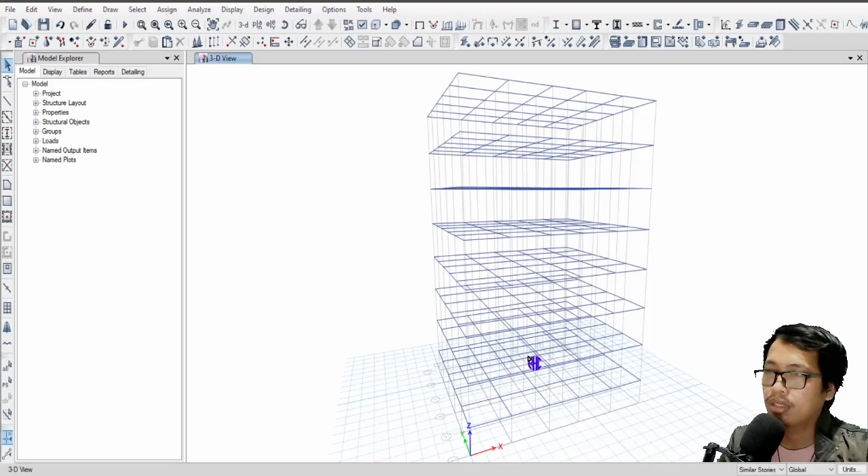Then let's just click elevation, any grid line - let's say grid line A.